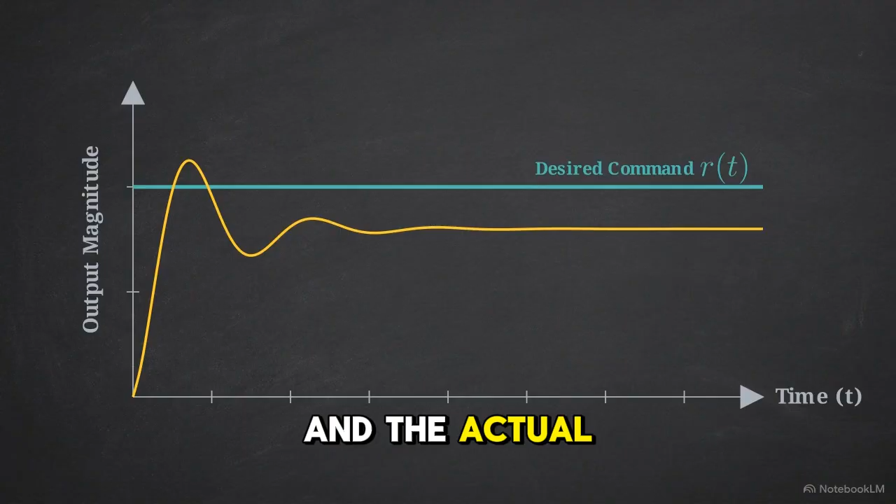In engineering, steady-state error is the permanent gap between a desired command and the actual physical output of a machine, remaining long after the initial transient startup effects have settled. You experience this discrepancy in everyday hardware. A vehicle's cruise control might be set to 100 kilometers per hour, yet the speedometer locks permanently at 97. Or a thermostat programmed for 25 degrees leaves the room hovering at 24.5.

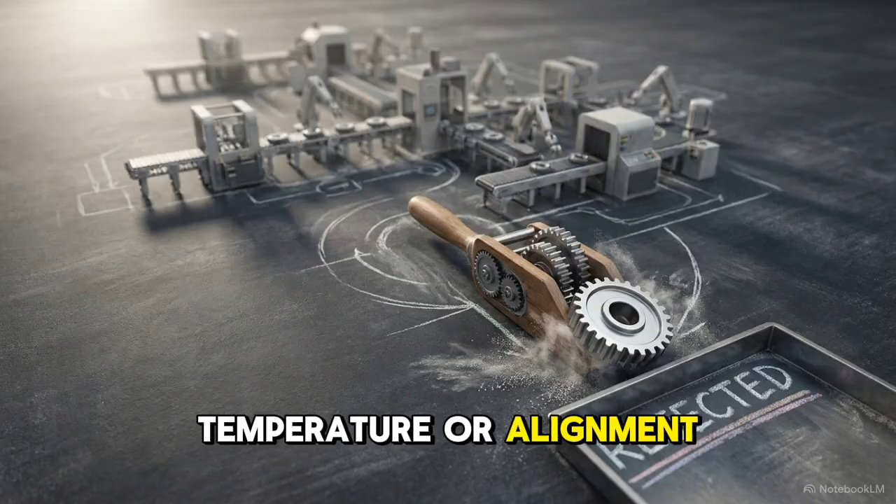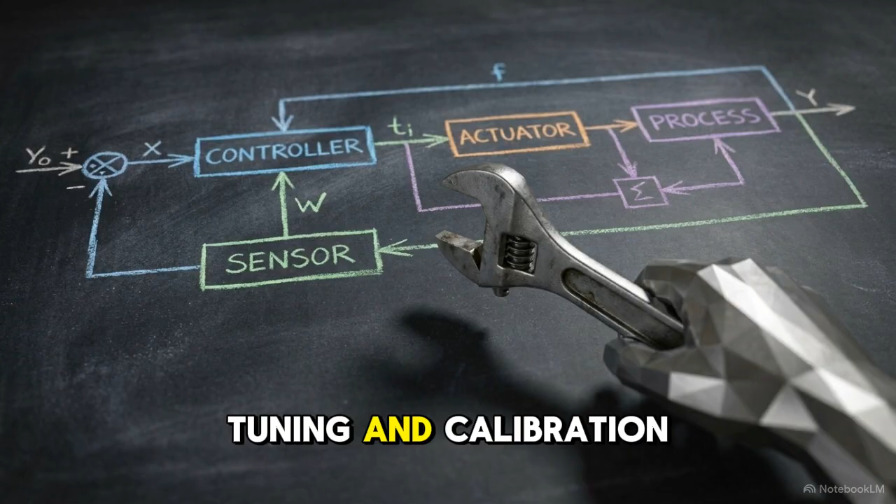These persistent discrepancies have severe consequences in industrial engineering. Small variations in temperature or alignment lead to rejected manufacturing batches and mechanical failure. An automated manufacturing arm might swing rapidly toward a precise coordinate, only to halt millimeters short of its target. These errors represent a structural flaw mathematically embedded in the system's behavior. Manual tuning and calibration cannot resolve a discrepancy that is hard-coded into the control logic itself.

Engineers face a paradox when designing these systems. A physical machine might lock on to a stationary target without error, yet fail to maintain accuracy against a moving one. The root of this discrepancy is the input profile. A system that maintains zero error when responding to a static step input can exhibit a large, unrecoverable error when tasked with following a constantly increasing ramp input. This behavior is a direct result of the system's mathematical architecture.

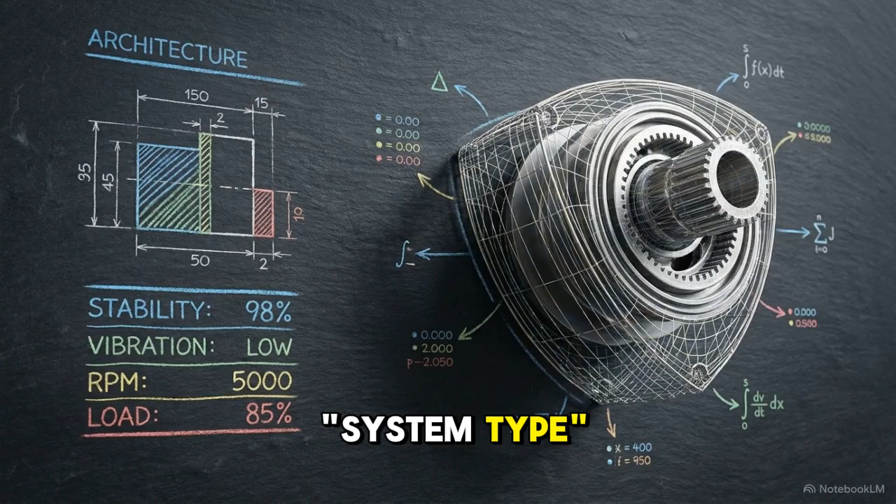The specific limits of a machine's accuracy are dictated by the internal structure of its open-loop transfer function. By identifying a single mathematical metric known as the system type, engineers can determine a physical machine's performance limitations before assembling a single component. Traditionally, calculating long-term accuracy requires solving differential equations to map out the entire time domain response of a machine. This process is complex and inefficient for rapid design.

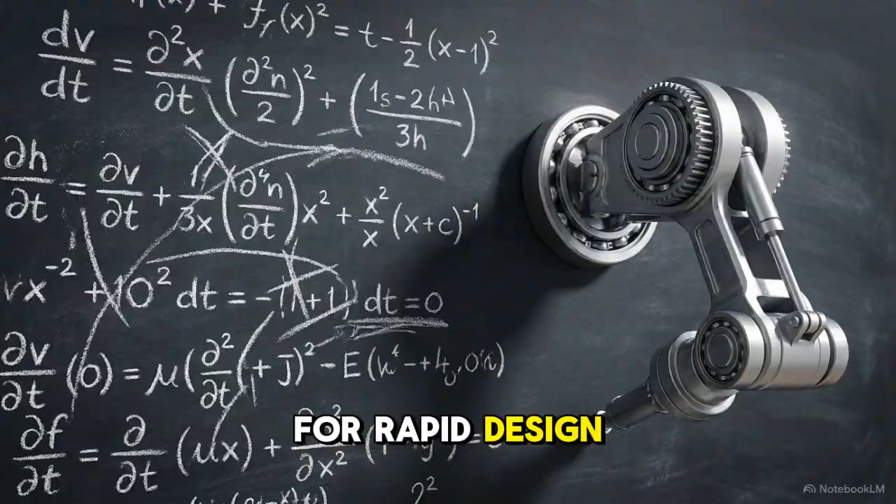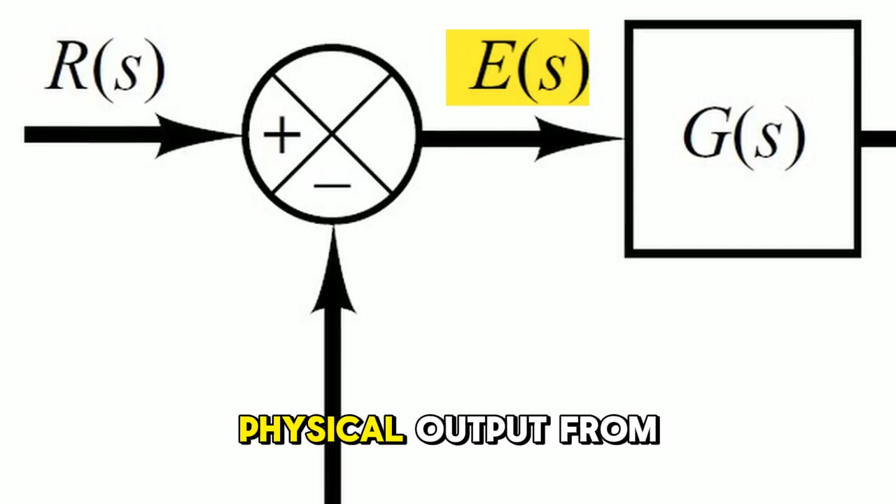This standard block diagram for a unity feedback control system shows the physical hardware as the transfer function G of S. The summing junction generates the error signal E of S by subtracting the physical output from the desired reference input. We can isolate the transfer function of that error signal through algebraic reduction. The ratio of the error over the input is equal to 1 divided by the quantity 1 plus G of S. To find the error at infinity, we use the final value theorem, bypassing the time domain by evaluating the limit as S approaches 0.

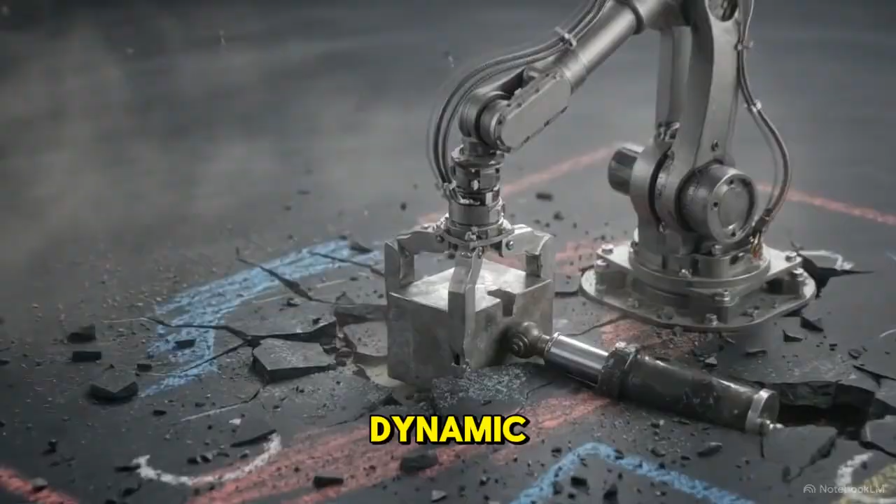Multiplying the input signal by our error ratio provides the master equation for steady-state error. This equation demonstrates that long-term error is a function of only two variables: the physical profile of the command R of S and the design of the plant G of S. Engineers must evaluate that input term against three different physical profiles to test the machine's ability to handle increasing dynamic stress. The step input, 1 over S, commands holding a static position. The ramp input, 1 over S squared, maps to a target moving at a steady velocity. The parabolic input, 1 over S cubed, commands the system to follow a constantly accelerating target.

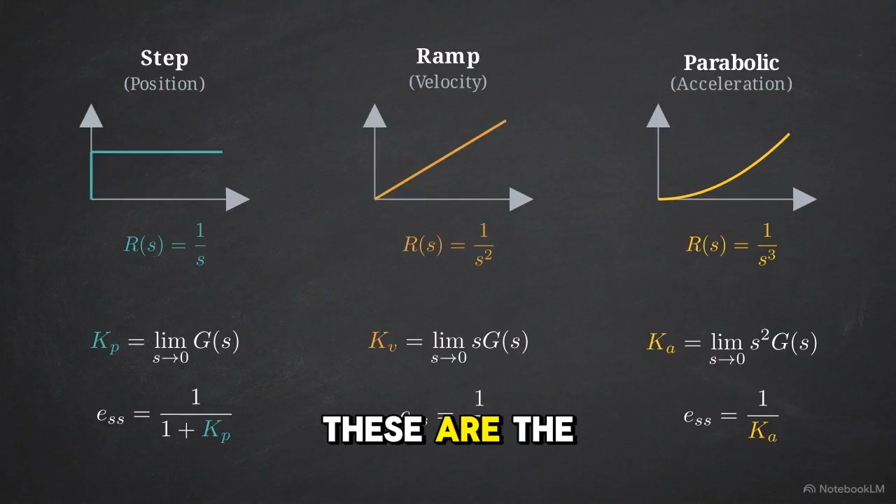When these three input profiles are applied to our limit equation, the S variables cancel differently, resulting in three distinct numerical constants. These are the static error constants: position, Kp, velocity, Kv, and acceleration, Ka. These denominator constants follow an inverse relationship. A larger constant results in a smaller physical error. As the physical demand shifts from holding a position to maintaining constant acceleration, the mathematical requirements for these error constants become significantly more difficult to satisfy.

Whether these constants are finite or infinite depends on a hidden term in the transfer function. Focusing on the plant's transfer function denominator, the term s to the power of n reveals the system type. This exponent represents the number of poles at the origin, corresponding to the pure integrators built into the system hardware. We map system performance by plotting its type against the three physical inputs. A Type 0 system produces a finite error for position commands, but when tracking a ramp, the error becomes infinite and the target is lost.

A Type 1 system uses one integrator to force the position constant to infinity, eliminating steady-state error against a static step. However, it achieves finite lag against a moving ramp and fails completely against an accelerating parabola. Pure integrators function as structural error annihilators. To track a more dynamic, aggressive target perfectly, the machine must be designed as a higher type system. We can apply this framework to determine the exact operational limits of any control loop by inspection.

Consider this transfer function for a complex control loop with specific numerical values. By looking at the denominator, we see a standalone S-squared term. This identifies the hardware as a Type 2 system. Based on this structure, the position and velocity constants are both infinite. The steady-state error for both step and ramp inputs is guaranteed to be 0.

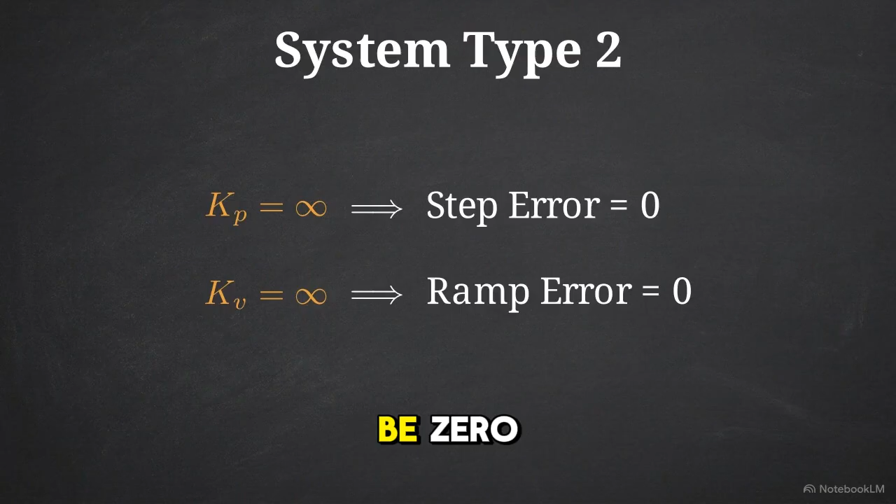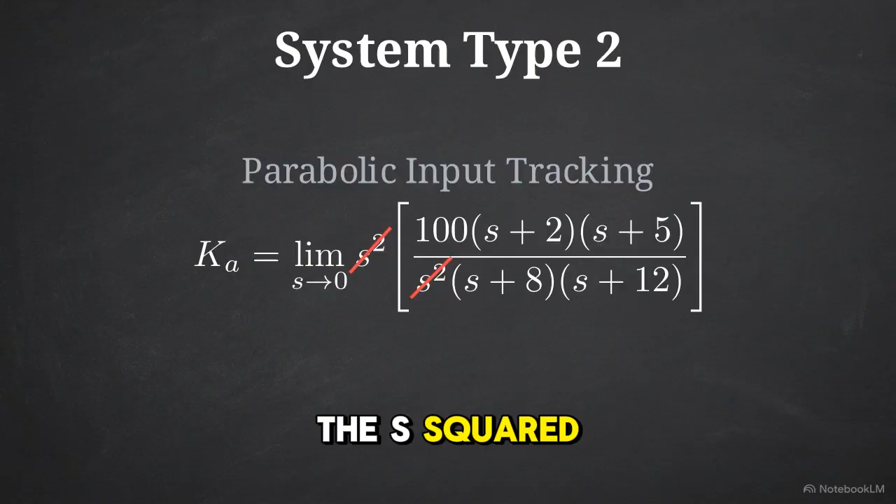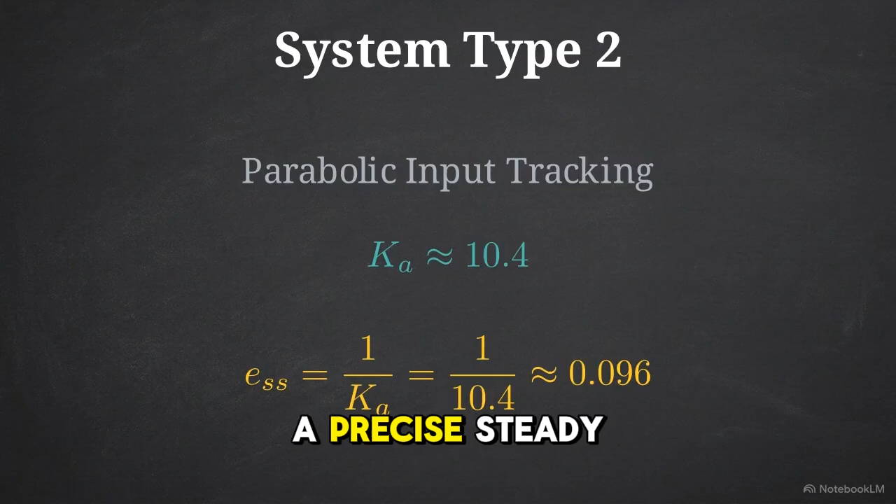The only remaining calculation is for the system's tracking vulnerability, the parabolic input, which we evaluate using the acceleration constant, Ka. In this limit, the S-squared term from the accelerating input cancels the S-squared poles at the origin of the Type 2 plant. Solving for the remaining constants reveals a finite acceleration constant of 10.4, which results in a precise steady-state error of 0.096. Identifying the system type provides a shortcut to determine where a tracking loop will fail, bypassing the need for extensive time domain calculus.

This 0.096 result has specific physical meaning if this equation controlled the altitude tracking loop of an autonomous drone. With a Type 2 architecture, the drone will hold a stationary hover and execute a constant velocity climb with absolute accuracy. However, if commanded to continuously accelerate upward, it will permanently trail its intended altitude by exactly 0.096 meters. The vehicle locks into a position just inches behind the command coordinate, unable to bridge the gap during acceleration.